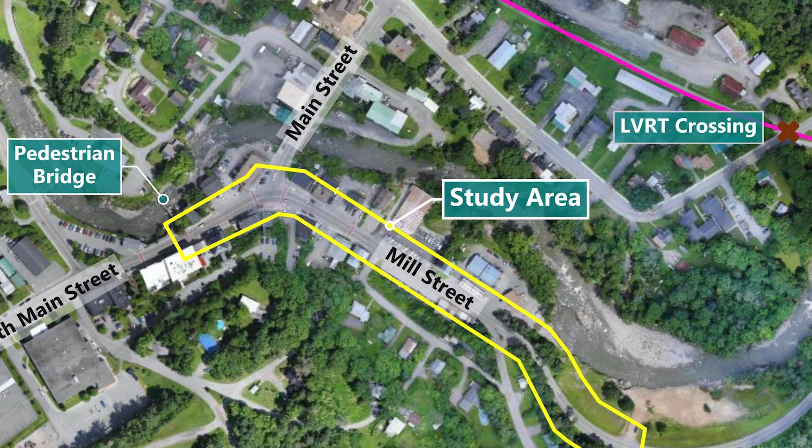So really focusing on the core downtown area here, thinking about some of the desire lines and future connections to recreational opportunities with the LVRT, and certainly thinking about some of the disconnectivity of the existing pedestrian network and multimodal ways of getting around the downtown core area.

After we conducted an existing conditions assessment and talked with the community about their concerns and issues, we went back and worked on developing a purpose and needs statement. The purpose of the study was really to create a safe, comfortable environment in the village core, and a clear transition zone to the core area, improve connectivity of the pedestrian network to support access to community destinations including businesses and recreational opportunities, and improve the multimodal transportation connectivity and infrastructure.

The project need: there were a few needs that emerged from those conversations and existing conditions. Certainly the lack of an effective transition zone - that traffic calming transition between the high-speed rural highway and the village center - a non-contiguous pedestrian network, capacity to handle increased multimodal activity, particularly thinking about engagement with the LVRT connection, and additional infrastructure deficiencies including vehicle turning movements through some intersections, missing or inadequate crosswalks, impaired stormwater systems - other elements of the roadway environment we focused on to improve the experience of everyone using this corridor.

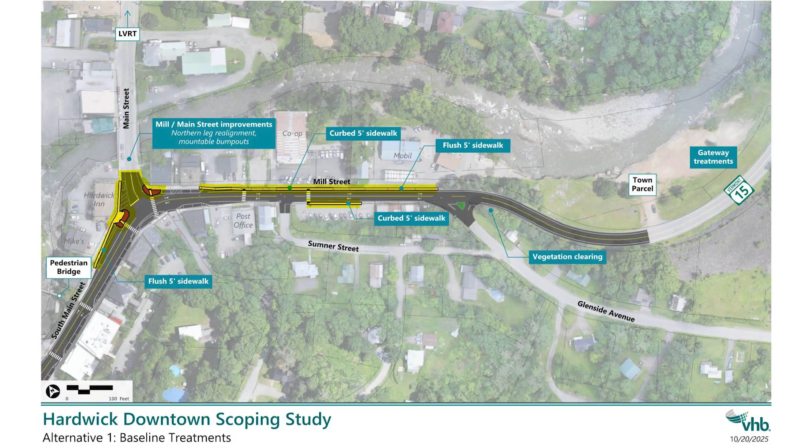So alternative 1, we were calling the baseline treatments alternative. This is really the core pieces we thought we needed to establish to address the core needs identified as part of the first part of the process. Just orienting folks to what we're looking at: over here is where the pedestrian bridge connection will be, and over here on page right is the town parcel that's part of the FEMA buyback process. We're really focused on the corridor between those two points, including the intersection of Main Street and Mill Street.

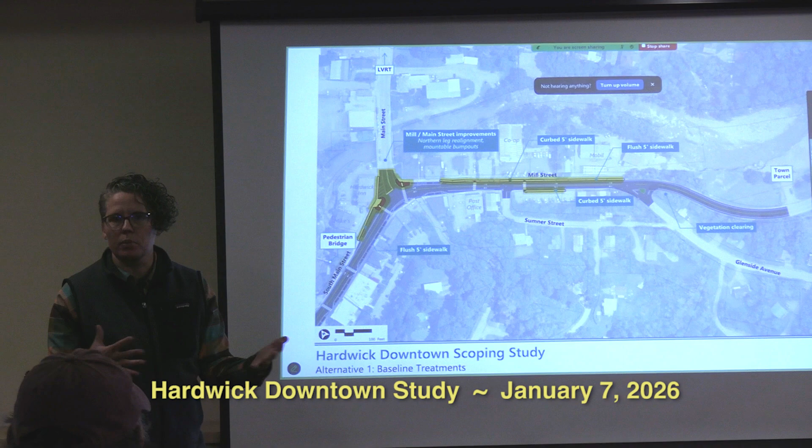So moving page left to page right, we're looking at delineating the sidewalk, particularly in front of Mike's, where there'll be a flush sidewalk to make sure folks know where they should be when walking through the space. Establishing some bulb-outs around the Mill Street, Main Street intersection, again to delineate that space and make sure vehicles and pedestrians understand where they should be as they move through.

Some additional sidewalk connections where the sidewalk is, in terms of its condition, past its useful life and needs some improvement.

Reestablishing those crosswalks that are existing at that intersection, and then really hardening the sidewalk along the north side of the corridor along Mill Street.

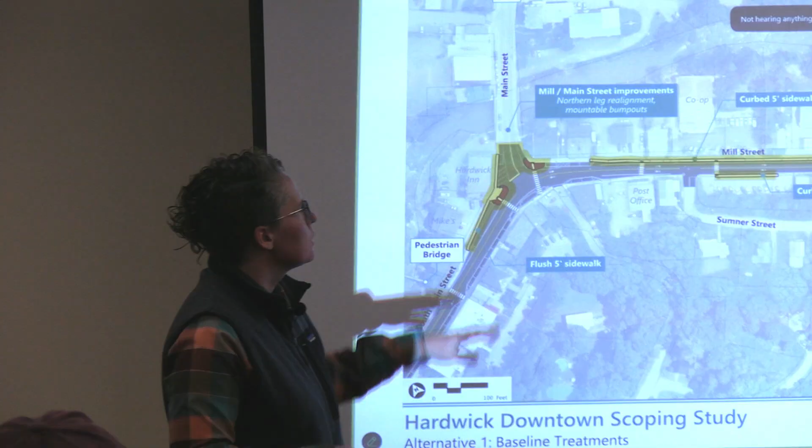So really establishing that delineated space where folks understand they should be walking, curb separated from the traffic where it can be, including a flush sidewalk through the gas station, the Mobil station, towards the end of the corridor.

It also establishes more of a curb sidewalk in front of the public parking on the far side, and makes some improvements to some of the crossings and access points to that facility.

Another recommendation, working our way towards the Glenside Avenue intersection and understanding some of the challenges with that intersection, really just trying to do some of the vegetation clearing that is needed to help with those sight lines at that location, but a minimal treatment option.

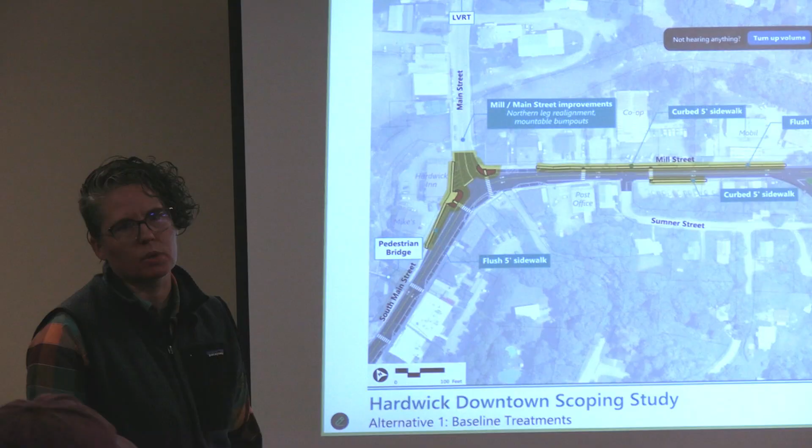So is this the extent of the area you're focused on? This is generally the extent of the area that we were focused on.

We do extend out a little bit with some of the recommendations, particularly later on you'll see around parking wayfinding, some of the transition zone treatments, that sort of thing. But yeah, this is the core area and scope of the project.

Quickly I'll step through. Alternative 2 has essentially all the same elements that you saw in Alternative 1, our baseline treatment option, but this one has moderate treatments, making some other improvements on top of those options. So a couple of things to note here.

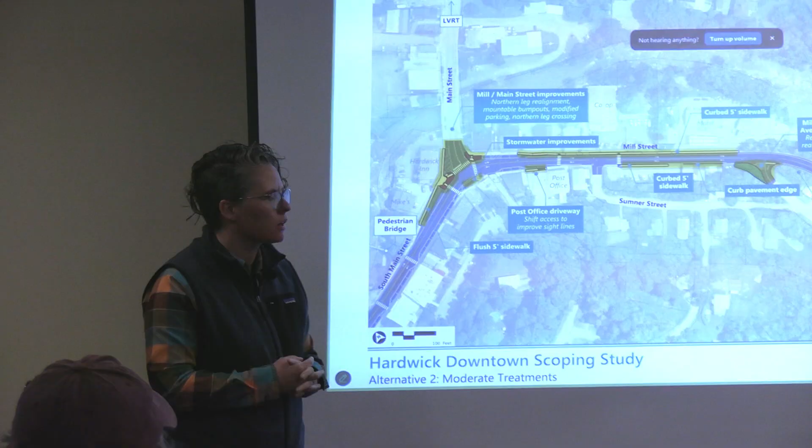The addition of another crossing across the North Main Street approach to the Mill Street Main Street intersection. We saw plenty of people making that crossing, even though there's not a crosswalk there and there's not really curb ramps established to make that crossing. So it's certainly a desire line for folks to be making that connection, establishing that crossing for those folks at the intersection.

And then, like we had in the first alternative, establishing that north side sidewalk, but with this option trying to mirror some of that on the south side. So a couple of additional things to note with this option.

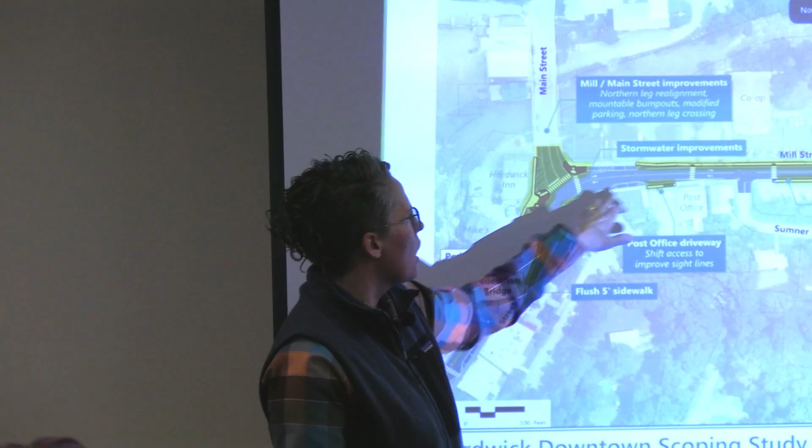At the post office, addressing one of the concerns we heard early in the process with some of the sight lines at that driveway, so actually flip-flopping where the driveway access is at that parcel and carrying through that flush sidewalk through that driveway.

And then again, establishing the curb sidewalk on the south side where the public parking is, but trying to carry some of that curb treatment along the south side, just to delineate and channelize folks and squeeze folks down as they're coming into the village, particularly as a driver, giving that visual cue that it's a constrained environment, you should slow down, you should expect to see pedestrians and other users of the roadway.

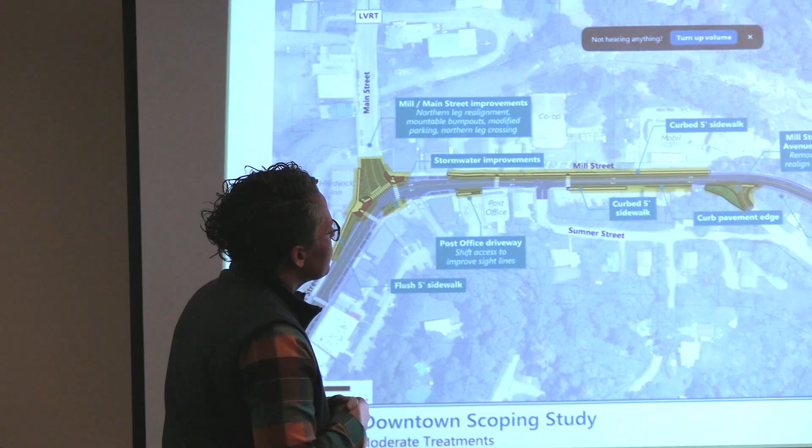The other component to this one that's a little bit different than the first alternative was focused on the Glenside Avenue intersection, realigning that intersection, taking away the triangle treatment that's there today, and teeing in the intersection, again with vegetation clearing, trying to improve the sight lines at that location, and simplifying some of the complexity at that intersection for drivers.

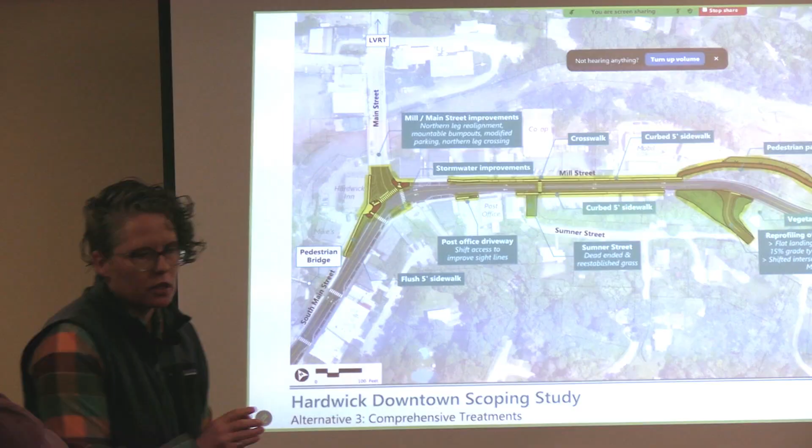And then finally, with the third alternative, the more comprehensive treatment option here, it layers in a couple more treatments to carry through some of the needs that we wanted to address with one of the alternatives. So again, all of the same things you saw in the previous alternative, but then it layered in really establishing and hardening a sidewalk connection on the south side.

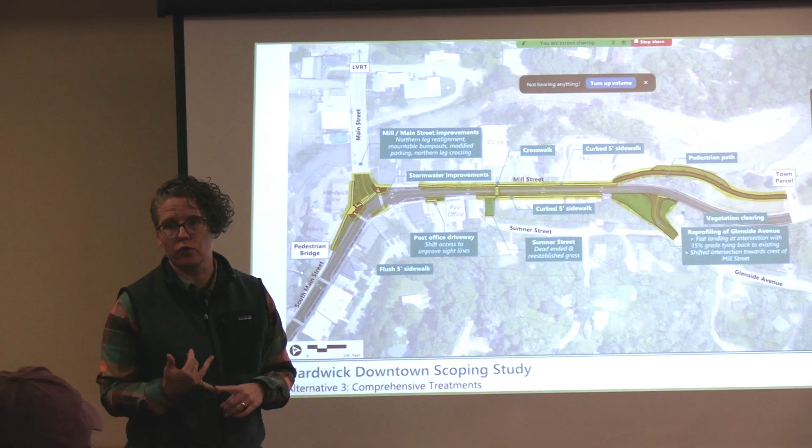And so with that, it contemplated closing Sumner Street so that we could actually establish a crosswalk, or a sidewalk connection, that meets our cross slope requirements for an accessible sidewalk and pedestrian network connection on the south side.

And then a curb sidewalk all the way through to close to where the Glenside Avenue intersection is today. Another component of this alternative that was contemplated and discussed in the last meeting was really doing a full realignment of the Glenside Avenue intersection.

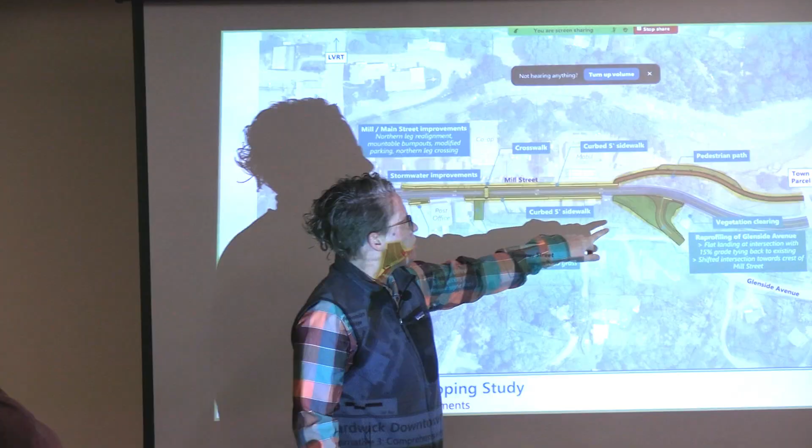So really the crux of this component is that we'd realign that intersection to come into Mill Street at the crest of the existing hill along Mill Street.

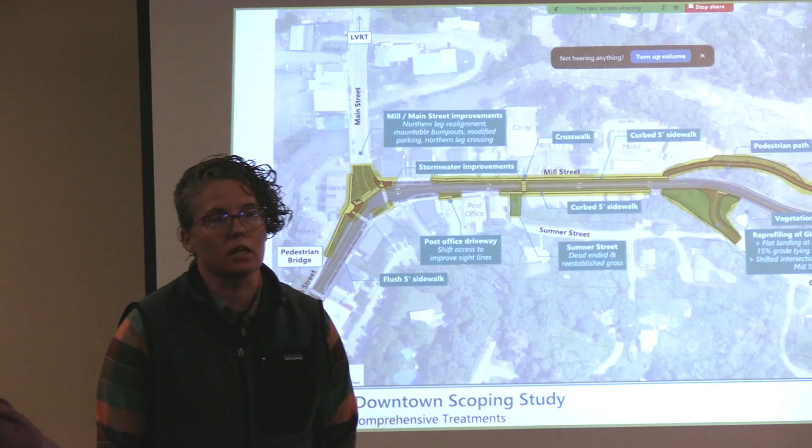So really realigning that intersection to create the best sight lines for folks coming off of Glenside Avenue, and really cutting into the slope where we were doing the vegetation clearing in the previous alternatives to create that connection and really establish some better sight lines and visibility of that intersection, really daylighting that intersection for folks on every approach.

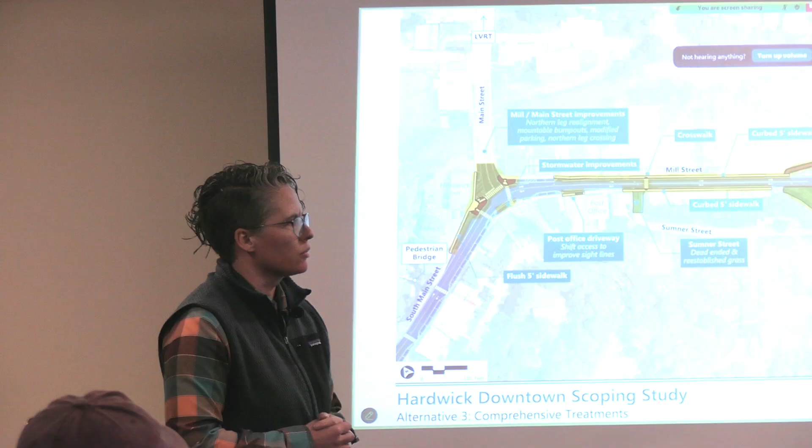Finally, the last major piece of this alternative was contemplating a pedestrian connection into the town parcel at the eastern end of the project area. This is really thinking about the future use of that parcel, which will probably be used for flood mitigation and floodplain reestablishment, but could also be used for recreational or green space purposes in the future. So we're contemplating what it would look like to potentially connect those resources to the pedestrian network downtown so they're accessible to folks.

Last time we were with the community, we talked about those three alternatives and the evaluation associated with them. We won't go into that level of detail again, but just to highlight a couple of things in terms of evaluation: as you noticed, we layered on a number of options and components in each of those alternatives, so progressively it gets more expensive. There are costs associated with each component of the plan. But what we did on the back end is start to parse those out into projects that could be implemented in a phased approach—a small project here, a small project there, as opposed to one big lump sum to fund. If you contemplate all of the comprehensive treatment in alternative 3, we're talking about somewhere in the range of $1.2 million.

Then there's a slew of other things we evaluate as part of this: traffic operations and improvements, which generally show improvements across the board; safety improvements, whether it satisfies the purpose and needs statement at the top of the program; utility impacts, which as we add more components and move intersection alignments, means more impacts to utilities. Right-of-way impacts—again, with the Glenside Avenue intersection realignment, that's where we get into right-of-way impacts, and that parcel on the corner would definitely see some impacts to do that realignment. And resource impacts—we're generally working within the built environment and roadway environment with any of these options, but with that realignment at the intersection, there'd certainly be some impacts and implications.

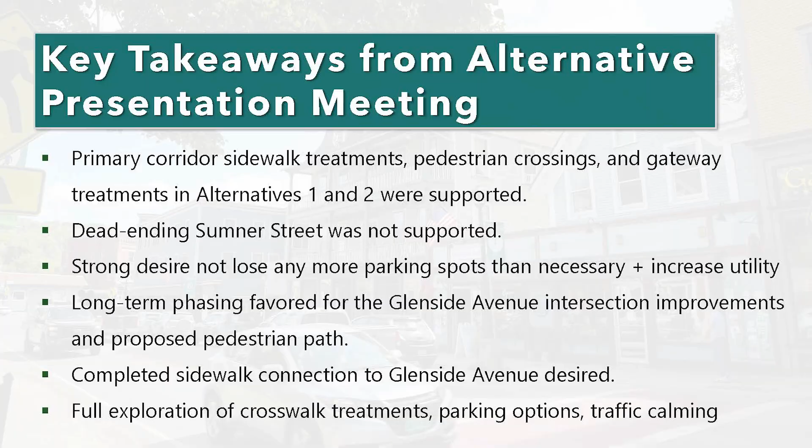One of the things we also heard is about the dead-ending of Sumner Street. We talked about some options to mitigate that—potentially dead-ending Sumner Street but connecting that corridor up the hill a bit behind the post office parcel—and there were a lot of ideas about the vision for what that could be. We decided it was outside the scope of what we wanted to accomplish with this project, but noted there may be future opportunities to make that connection, really achieving a cross slope that works for an accessible crossing at the Sumner Street intersection, by potentially in some future phase dead-ending that road and making the connection elsewhere. But we heard that we couldn't do that without making that connection elsewhere upslope, so we tabled that for this preferred alternative.

We certainly heard a strong desire not to lose any parking downtown, and to increase the utility of the parking we do have, so we're thinking about how to address that with refinements to the alternatives. Long-term phasing was favored for the Glenside Avenue intersection—getting into that mentality of a phased approach where we first do the pedestrian treatments and address those needs, then think about what we can do to that intersection to make it safer for everyone.

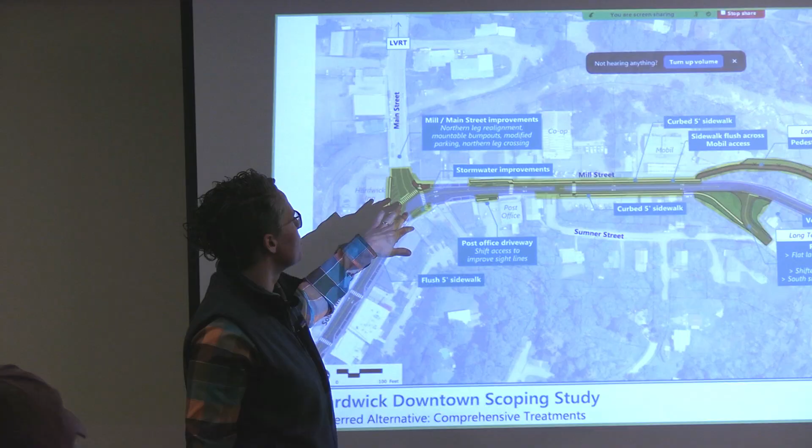Again, we're really establishing the sidewalk along South Main Street, the bulb-outs at the intersection of Main Street and Mill Street, the additional crosswalk across the north side of that intersection, and really establishing and hardening the sidewalk connections along both the north and south sides of Mill Street.

The additional sidewalk connection up to Glenside Avenue would be included as part of the longer-term project to realign that intersection, along with the long-term pedestrian path over to the town parcel, which we're contemplating as a longer-term component.

So we'll zoom in and look at a little bit finer detail, a little bit bigger on your screen here, for some of those treatments, just to get some familiarity.

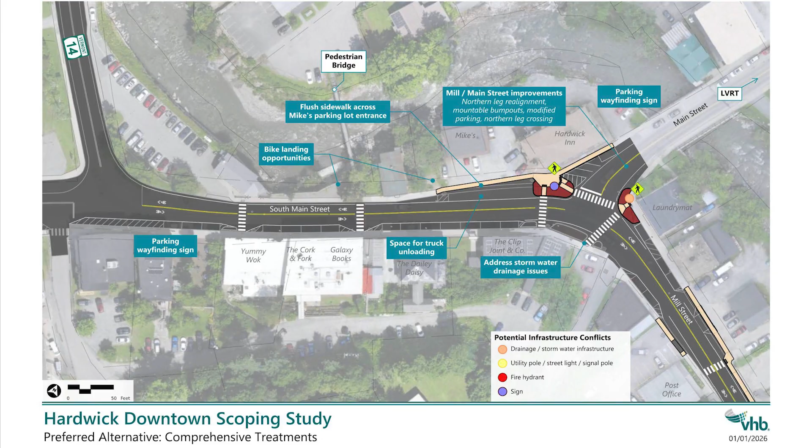So we're a little shifted from the previous orientation. Here's the pedestrian bridge and existing sidewalk. A couple of additional things to note here in the preferred alternative.

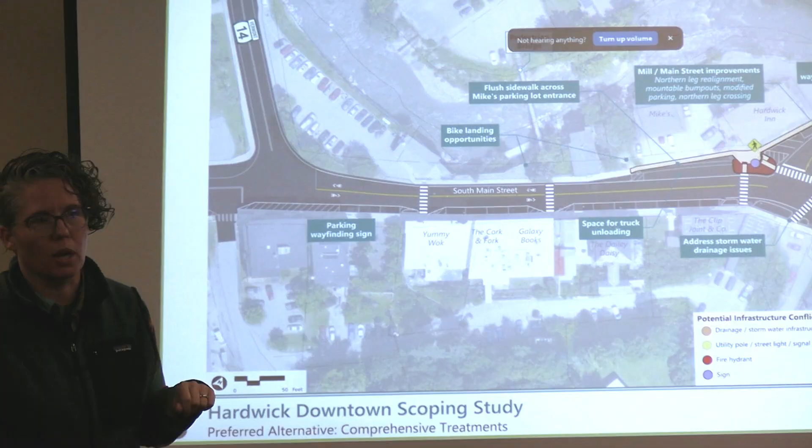Recognizing there are some bike landing opportunities, especially with more traffic from the LVRT, we're finding places to establish bike parking in downtown—either at the landing above the pedestrian bridge or at the park here at street grade—to create an intercept for folks who want to be downtown.

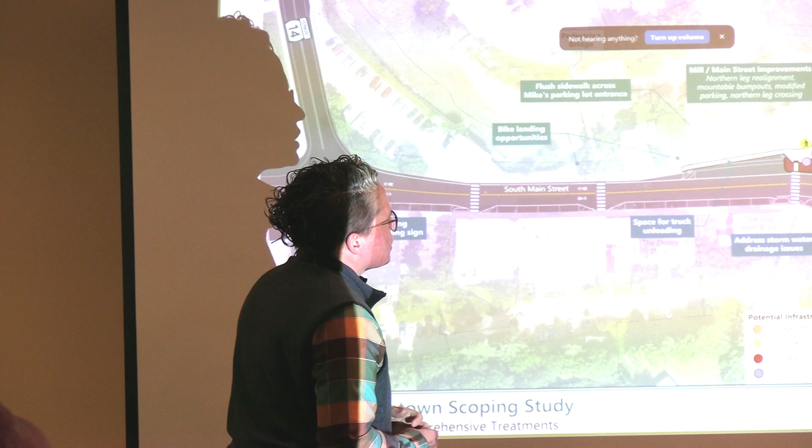Again, at the intersection, we're contemplating some bulb-outs to take up that extra space and delineate it for turning movements. It's certainly a complex intersection, and we did see folks passing on the right to make a turn around someone. The bulb-outs on the far side really limit the ability to pass on the right when someone's making a left, drawing in the edges of that intersection and making sure people know where they should be and limiting where they can be.

That also effectively shortens the crossings for our pedestrians, so we're really trying to make the space pretty friendly and approachable for folks on foot.

I'm just going to highlight here—this is the spot we had some conversation about the last time we were all together—that last parking space that is currently utilized as a parking space.

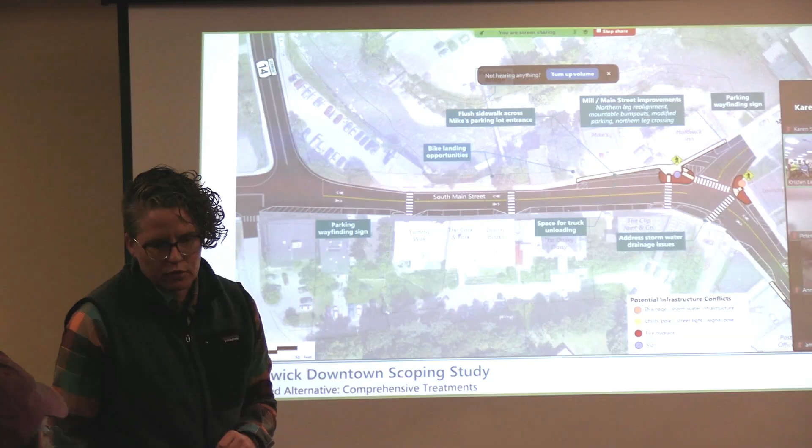Recognizing that there's an effective loss of space there, but as we move along the corridor, you'll see we were able to find a spot to gain that space back. A couple of other notes: we heard there's a need for truck unloading space, so maintaining this space in front of Mike's for truck loading and unloading.

While you're on this slide, I know that's not the focus area on the left side of town, but most people within walking distance live to the south or the west, and there's no safe crossing for any of those residents right now. The town just took out a crosswalk. I'm wondering why that area wasn't considered downtown. I'm not trying to sound cynical, but that's the most dangerous intersection, I think.

Yeah, we absolutely recognize the complexity with the way that intersection is controlled for traffic, and the lack of pedestrian access there. For this project, it's just outside the limits of our scope, but Tracy has something to add. This is not meant to be the end-all and be-all of traffic planning, it's just a first phase.

When the grant was first being considered, it was only going to be Mill Street, because that's the street that has no sidewalks right now. There was a little bit of mission creep even coming onto South Main. But we understand there needs to be additional work done. This is just the first bite of the apple with this study.

Anecdotally, having worked right where the old co-op was, no one ever used that pedestrian bridge, by the way. It's not how people are coming to town from the residential areas. It's an awesome bridge, don't get me wrong, we'd love to take breaks and go there, but I'd see more need to fix this end of town than fix Glenside.

In terms of pedestrian access, it's a very dangerous intersection. I'm surprised we don't have more car accidents there, but I think far more people are walking and biking from this other end of town.

Now that we've been through this process with that street, we can just do it again, pick up where we left off here, at this end of the corridor. Great point raised, and recognizing that establishing these connections is going to hopefully increase that demand for some of these other parts of town that do need to be addressed.

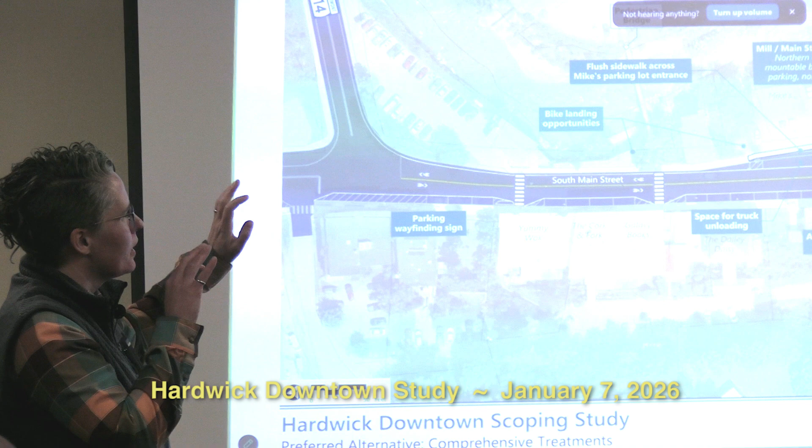One more note worth highlighting is the parking wayfinding signage. We noticed on the way in a lack of parking wayfinding, especially coming in from Route 14 at this end of town. There is some parking signage up North Main Street, but it doesn't direct you to the public parking along Mill Street. So there's definitely a need there, and we'll talk a bit about that parking wayfinding recommendation later, recognizing there are some places that should be highlighted to let folks know where those opportunities exist, not just on the street.

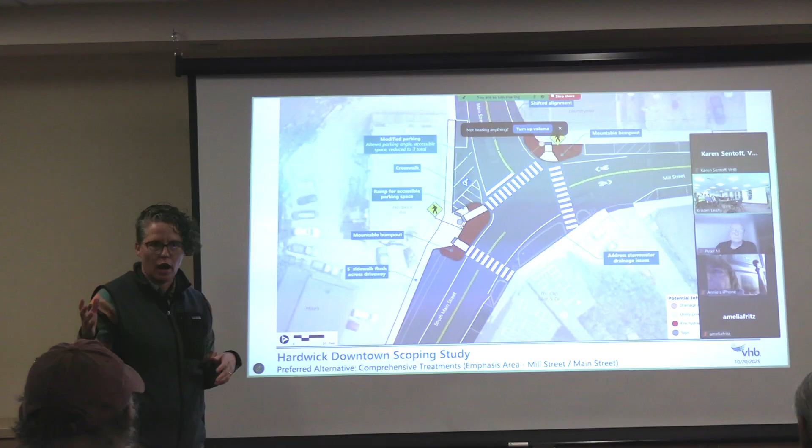Zooming in here on the Mill Street and Main Street intersection. Just to highlight the change in color here, the red is meant to be a mountable treatment, so trucks will still be able to get through, but vehicles will really not want to make that movement. We used a beveled curb and a raised section, so trucks can track over that and make the turns they need at that intersection, but passenger cars typically won't want to go over the curb. So it effectively takes up that space so vehicles know where they should be in the intersection.

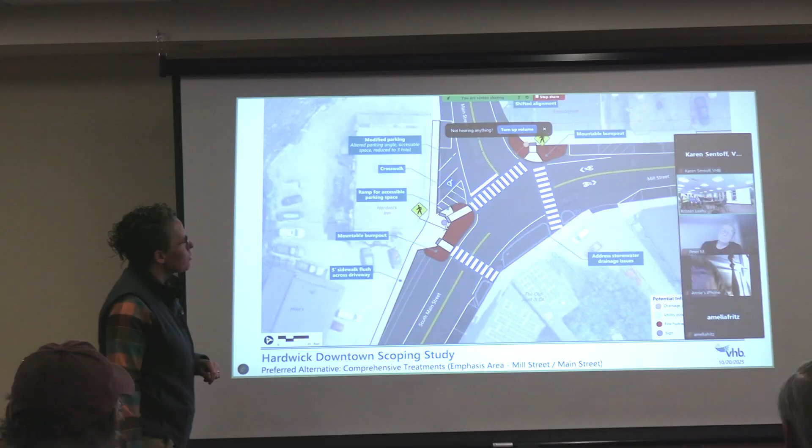This also has the added benefit of shortening the pedestrian crossings, establishing that crossing on the north side of the intersection where that desire line is. We'd modify the parking layout a little here to get those spaces in and establish an accessible parking space, with signage for the pedestrian crossings, and shift the alignment slightly on this segment of North Main Street to tee in that approach and make it clearer where folks need to be.

Can I ask you a question about that? Certainly. On the north side of North Main Street at the laundromat, what's the purpose of that bump out there, where there was once a parking space before the realignment of Route 15 through town?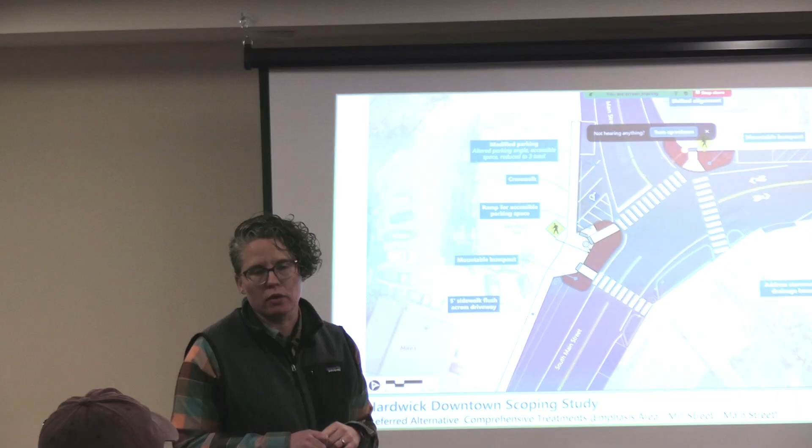Okay, well, so a couple of things to be thinking about, for this side and for that side as well. Really, the letter of the law says that we need 20 feet between parking and a crossing in the state of Vermont, so we're really trying to establish that buffer space for parking spaces to be outside of that 20-foot buffer. That's about making sure pedestrians are visible and not blocked by a parked car close to the crossing.

Does that show the current bump out on the other side of the road across from the laundromat? The bump outs are shown just like a gray outline here. Yep, so those are the existing ones.

Just putting a note out there that one in front of the inn, people are going to blow their tires on that unless it's made to be driven over. Yeah, they had to redesign the rotary in Hyde Park because it kept blowing out tractor trailer tires. If somebody comes down that hill with a trailer, they're gonna either drive into oncoming traffic to make it around that turn, or they're gonna have to drive on top of it, if that's roughly to scale.

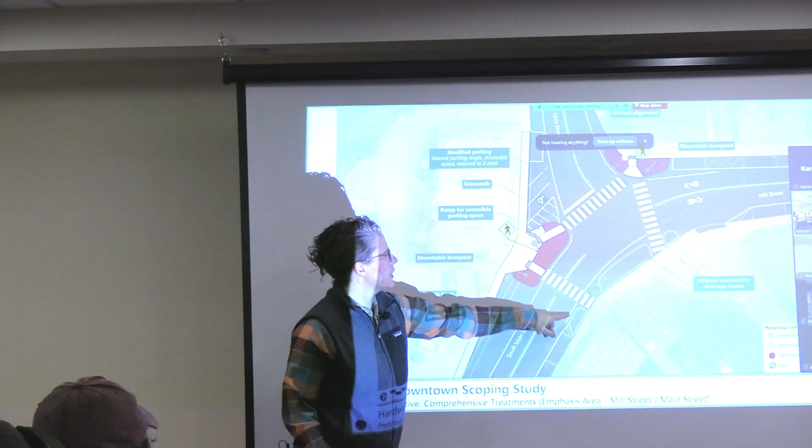Yeah, so can this be made like the other bump outs in town right now? It's more of a curbed bump out with quite a bit of reveal. These would be essentially like the mountable section, a little less egregious than the mountable section in the middle of a roundabout, right, where the tractor trailers are tracking now. Yeah, so it'd be an angled curb and then a paver treatment on top that feels uncomfortable for a car to be on, but the tractor trailers will be able to roll right over it.

Okay, I'm gonna keep moving forward, but we can definitely double back if folks have additional questions.

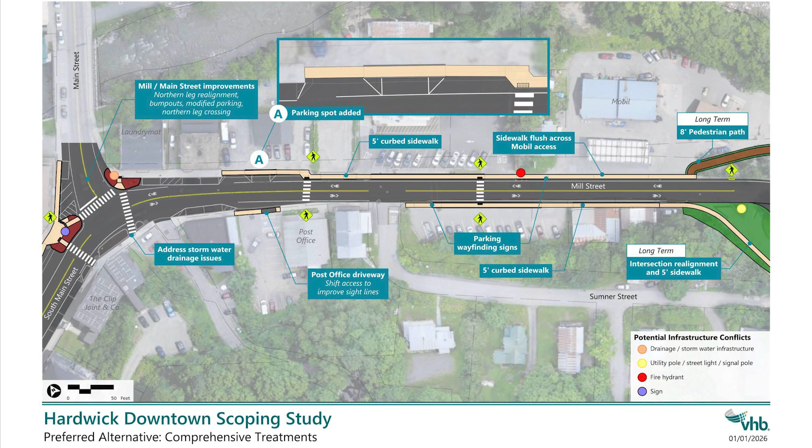As we move along the corridor here, on the north side we shifted the alignment of the sidewalk to establish one more parallel parking spot, and then we shift back to neck in and make that crossing over to the post office pretty short. Then, again, establishing the sidewalk along the north side, and once we're in the public parking area on the south side, establishing that sidewalk along the south side.

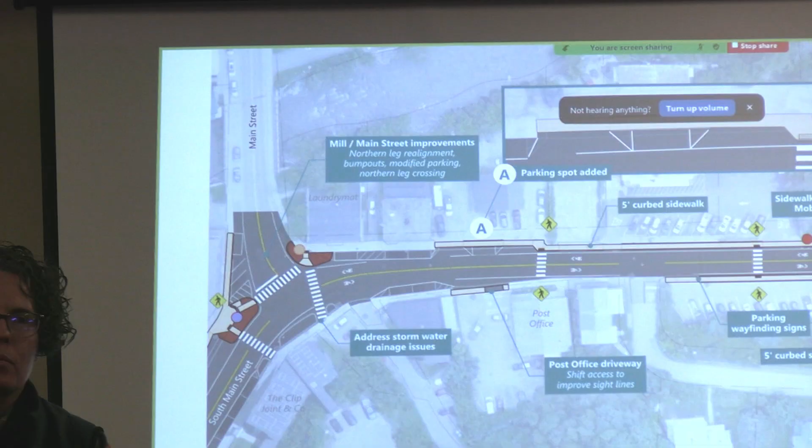The thing you're not seeing here is the dead ending of Sumner Street, and we're really focused on that cross slope. Sumner Street comes in at a really steep angle, and technically, based on the standards we need to meet for an accessible crossing, that steep slope just doesn't meet the bill.

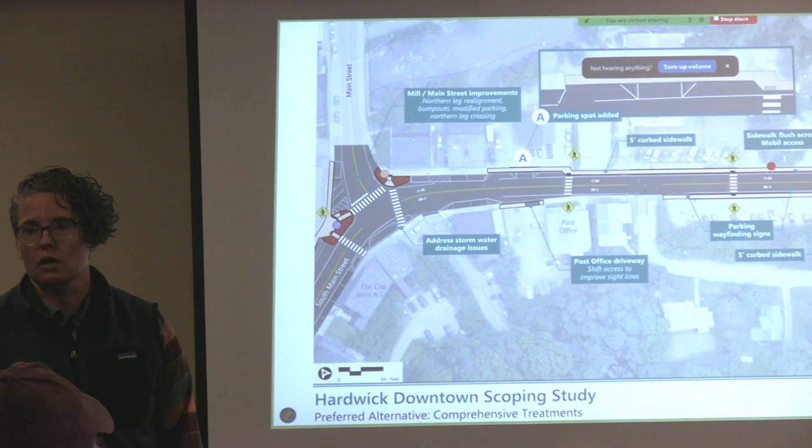So although there will be a sidewalk and then a gap and then a sidewalk, folks will walk on that side. But really, to meet the spirit of what we need to achieve for an accessible crossing, we will have the accessible crossing here at the post office and then establish another accessible crossing on the far side. So if folks really do need this accessible route, that'll be available on both sides of the road to make that connection.

Certainly, parking wayfinding, recognizing that opportunity for the public parking. This preferred alternative does include that shift to the post office driveway to help with sight lines, and contemplates that sidewalk treatment on both sides, flush through the driveways and flush through the access to the Mobil parcel there on the north side.

And then would parking at the post office be on the haircut side?

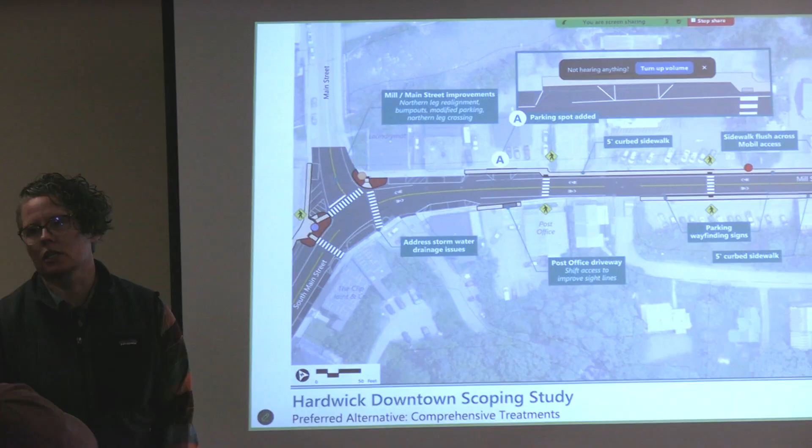Yeah, so it would flip-flop how the parking is on the interior circulation. Our sidewalk and curb would come through this section, which is right now the driveway. Then the driveway would be where the current parking is, and the nose-in parking spaces would end up likely on this side of that driveway to make that change.

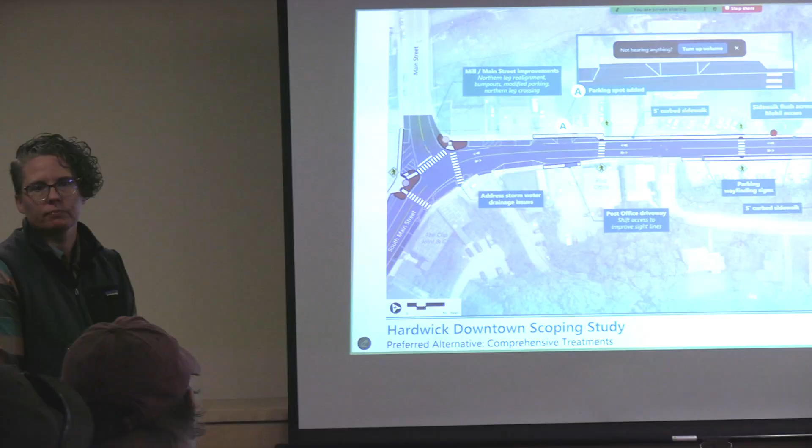Does that affect the parking in the back of that lot? Yes, which seemed like the preferred approach. They want to change the site circulation for that location. She's going to need permission from the post office, the USPS, to do so. Yeah, and that would be a really helpful change.

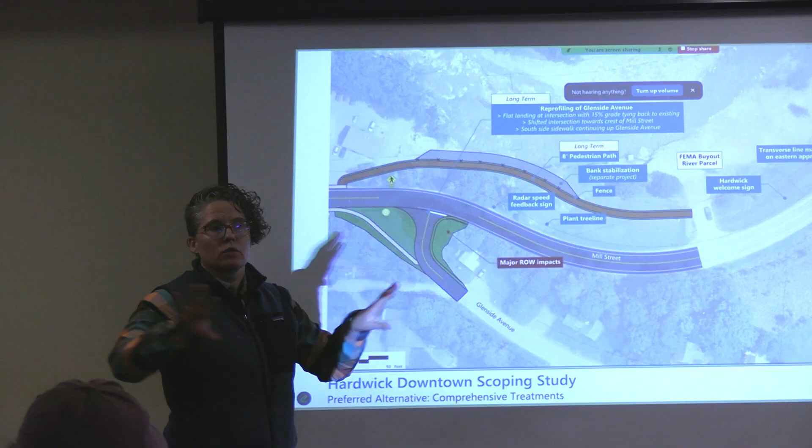And then here at the eastern end of the corridor, just a couple more things to highlight. Certainly contemplating in the long term that realignment of the Glenside Avenue intersection, which establishes the intersection point with Mill Street at the crest of the hill, creating the best sight line we can for folks coming off that roadway. This does mean some right-of-way impacts for that parcel on the corner, and some significant regrading that would have to occur.

Again, long-term vision here, including that pedestrian path into the town parcel and trying to establish that connection for whatever the future use of that area will be.

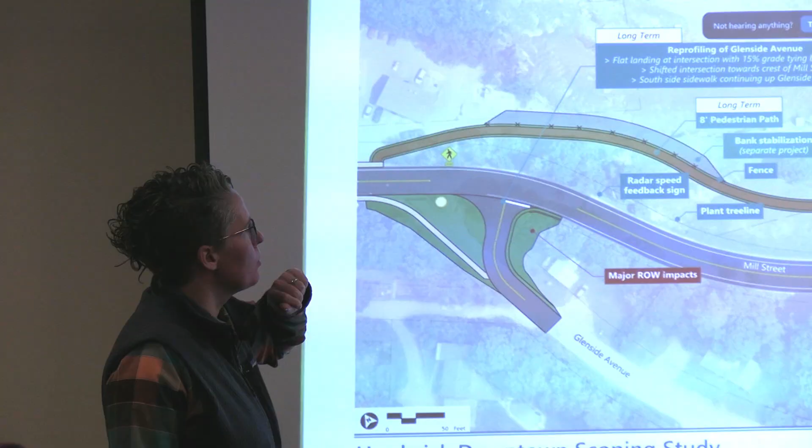And then just recognizing a number of gateway components that we wanted to pull forward, to establish that transition zone and get folks to slow down sooner as they're coming into the village from the rural high-speed highway zone. So a couple of recommendations: transverse line markings, which I'll show you an example of, as you come into the curve here, and certainly want to coordinate with VTrans on that, since the line in the sand is somewhere around here of where it transitions to Class 1 town highway.

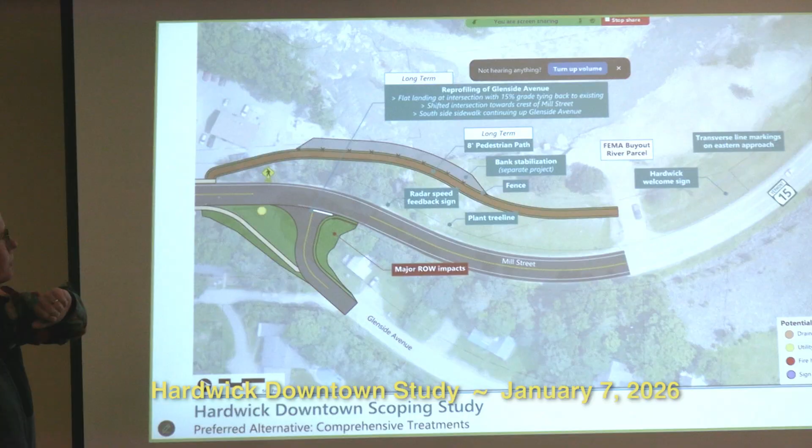Establish a welcome sign that gives that visual cue that you're coming to a place, time to pay attention and slow down and think about how you're operating your vehicle. And then another suggestion is planting a tree line, if possible, along the edge of that parcel, again giving that visual cue that there's an established thing you're coming into, so start paying attention.

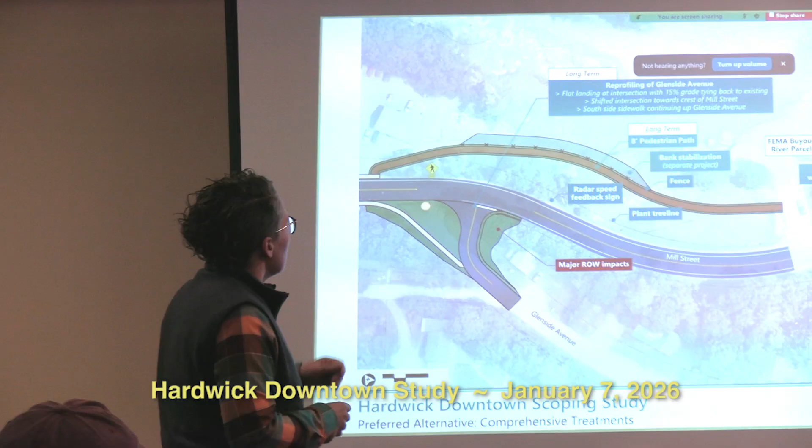Another recommendation is to take the existing radar speed feedback sign and move it to this side of the curve, again giving that visual cue for folks to slow down and start paying attention to how they're operating their vehicle, catching them before they get to the Glenside Avenue intersection so they can slow down and get feedback on how fast they're going. There's a couple things to think about with that, but we'll get into more detail in the next slides.

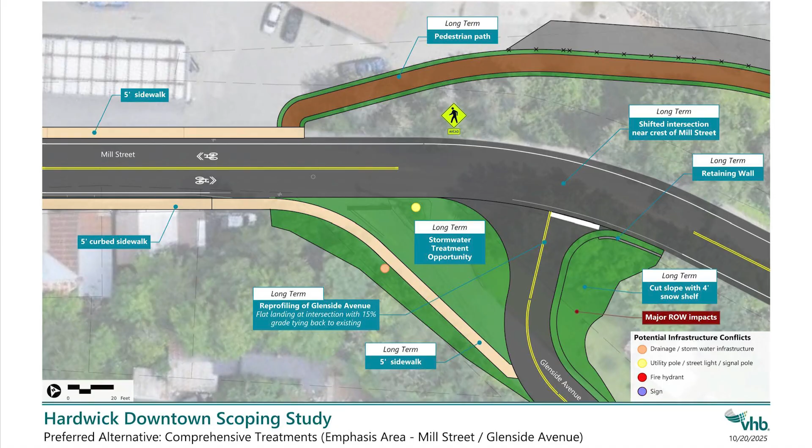This is just a zoom in at the Glenside Avenue intersection and a couple additional elements we wanted to pull forward as part of that conversation. Certainly this will take regrading and reprofiling, and we'll want to meet the crest of the hill that is in the existing curve there.

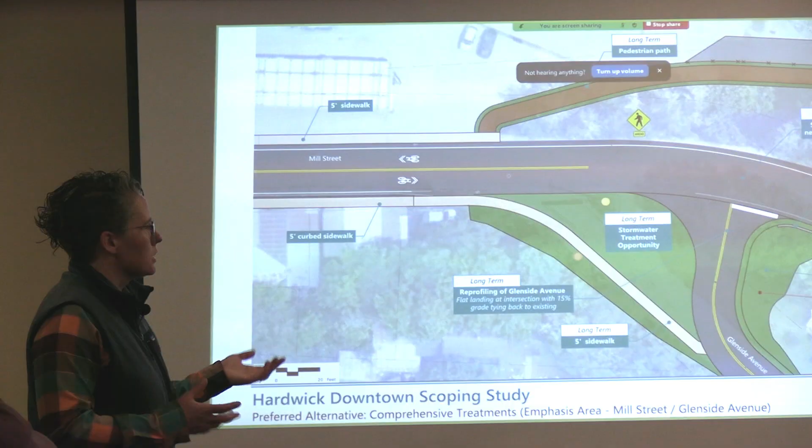What this realignment does, a couple things: certainly there's going to be a cut slope and a need for a retaining wall, but it establishes the intersection to create great sight lines in both directions. It also creates an opportunity for potentially some stormwater treatment, especially coming off that hillside, an opportunity to catch some of that stormwater and handle it there instead of further down the system. So really an opportunity for that treatment.

What we heard loud and clear in the last conversation is trying to create that connection up to that neighborhood, making sure folks in the neighborhood of Glenside Avenue, Sumner Street, and further afield have a place to get into the pedestrian network up the hill a little bit. So really trying to make that connection along the existing edge of roadway, which is essentially the edge of what you're seeing here for that sidewalk.

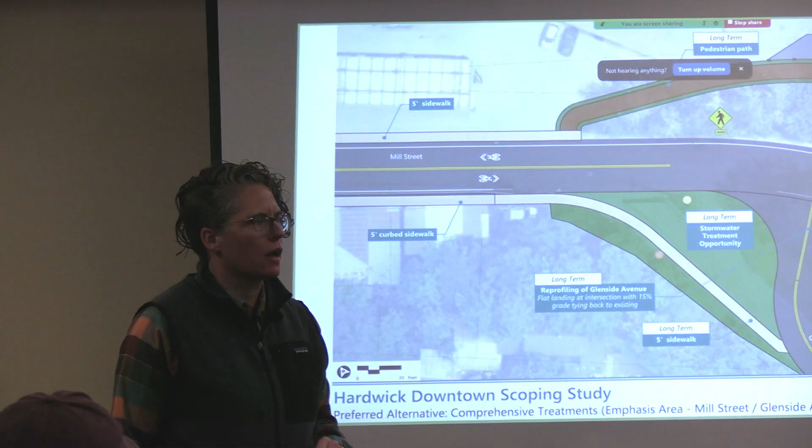And there are some features in here to consider. There's an old retaining wall that is historic through that section, so that's something we'll want to maintain as part of that project.

That's going to take a lot more work on Glenside because it's hardly walkable given how narrow it is. Yeah, I don't see people walking down from one side. Absolutely.

Not often, no, it's too steep. I don't think there's... I've seen a couple people walking down. I used to go do it.

All right, so just focusing in on a few more of the recommendations and treatments we were asked to dig into in a little more detail the last time we were all together.

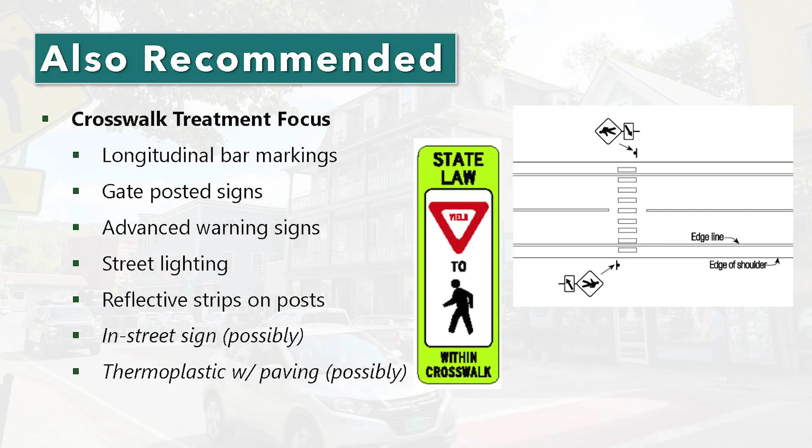One of the things was crosswalk treatments, and we heard loud and clear that we want our crosswalks to be visible and folks to be paying attention to them. So we brought forward a handful of recommendations for establishing those best practices. Longitudinal bar markings are what our standards and guidance tell us is the most visible treatment you can have in terms of pavement markings to establish a crosswalk. That's these bars you're seeing on the page here.

Gate posted signs means actually having a pedestrian crossing sign on both sides. So if you're blocked by a vehicle or something else, you still see that there's a pedestrian crossing by seeing the sign on the other side of the road. It's essentially posting signs on both sides of the road for that crossing, for both directions.

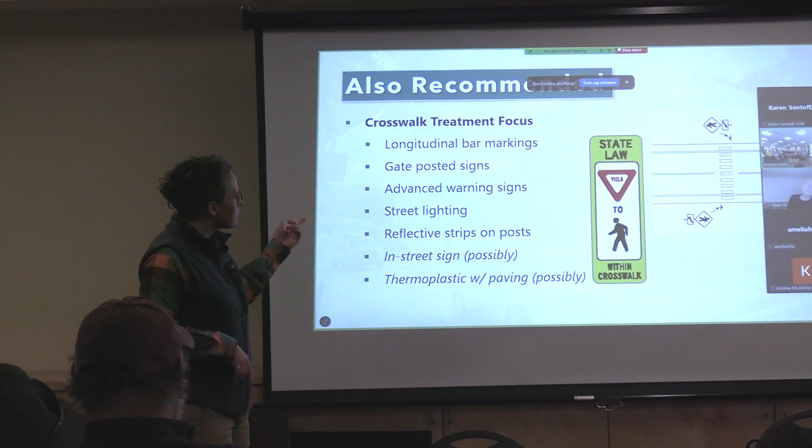Advanced warning signs - not every crossing has one that's appropriate, so we're making sure those are in place where appropriate. Street lighting was something that came up in the last conversation, something to pull forward here - making sure that as we're establishing new crosswalk locations, those are properly lit.

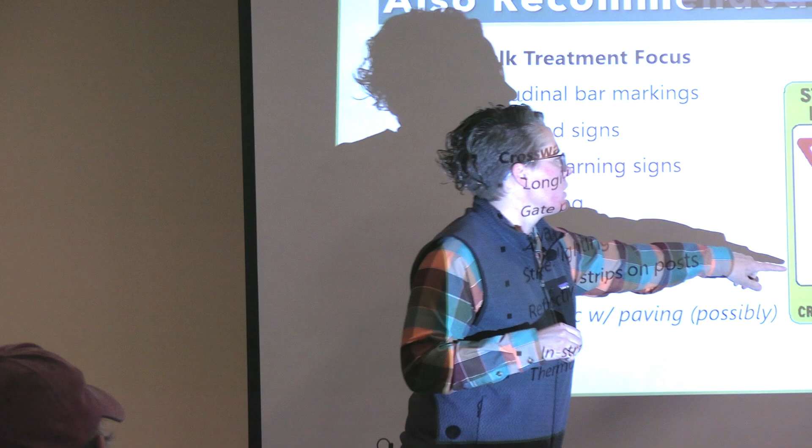We could add reflective strips on the posts for pedestrian crossing signs. That certainly helps, especially at night - makes it flash for folks with their headlights on it. An in-street sign is also another option, especially in this environment where you're in a slow zone downtown. Having a sign like this in the middle of the road, in the middle of the crossing, has that effect of channelizing folks and making them pay attention and slow down.

So those - and they got destroyed. Did they? They got run over? If you're making the road narrower too... I'd always... In some places it makes a lot of sense, in others, understood that they get run over.

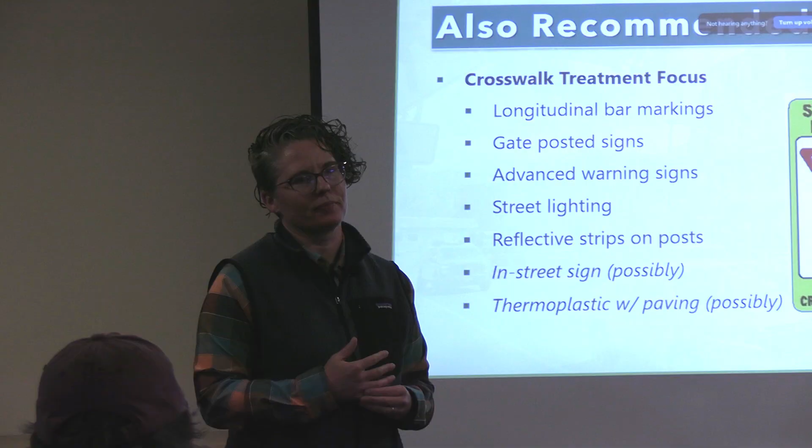The blinking light at the laundromat seems to work pretty well for giving people the cue to slow down. I was wondering if it would be possible to add more blinking lights, like by the diner. The state has a regulation on how close you can have those blinking lights, because their theory is if you have too many it actually distracts people. So there's a set distance. Those lights are good at night but not in the day - in the daytime people drive right through them. They're not large enough. I know they're bright, but people drive through.

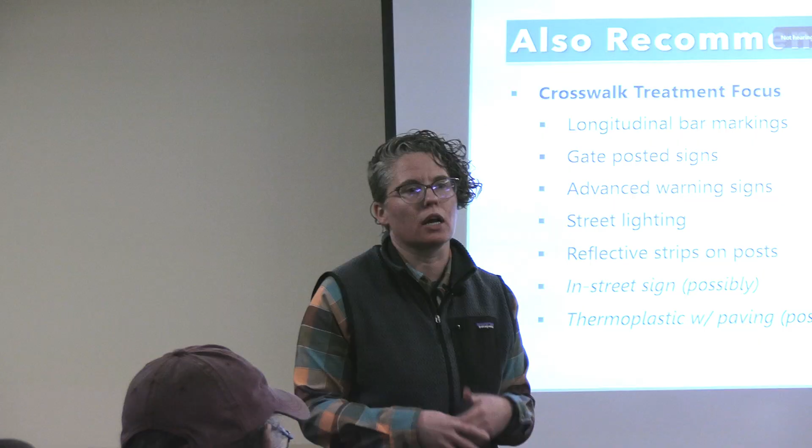So the RRFBs, the rectangular rapid flashing beacons, are a great option, but we don't want to just have every crosswalk have them. If there's a particular desire line that sees a lot of pedestrian activity, that's really where we want to concentrate having that kind of treatment. And the state really hates blinking things, generally.

I hate to say this, but I've never noticed the blinking light by the laundromat, and I drive through there four times. That's what I mean. Sorry, I've seen it a lot - it gets used a lot.

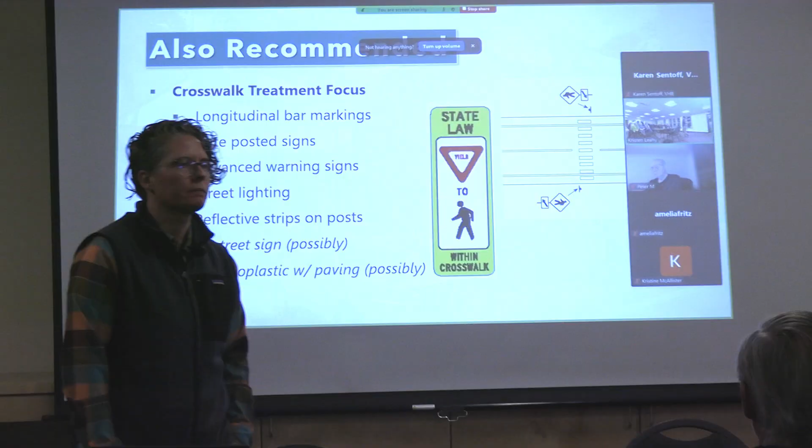So when you were talking about the crosswalk - when you push the button - the bar, the white bars, which we used to have. Yep, and then there was a lot of work done on pedestrian safety, with a committee of people that worked on that through the planning commission and the select board.

And then we tried these red crosswalks. While everything goes away in the winter, because it does, the red has actually been very effective in downtown. It's much more noticeable - I've noticed it in Newport and many others.

So it's also approved, but I need to see us go back to those white lines, because nobody sees them. Well, we could always combine it - have a red background with the white lines across it, and then it would be the best of both. But every time we get a quarter inch of snow, the white lines don't show no matter how they're arranged, whereas the red tends to show up a little better. And it's not to say that - right now you have transverse lines on each side of the pedestrian crossing, and then the red imprint in between.

Those transverse lines are also an approved and fairly effective visual cue, but currently only in downtown. It seems like people slow down more there, though I don't know when I cross it.

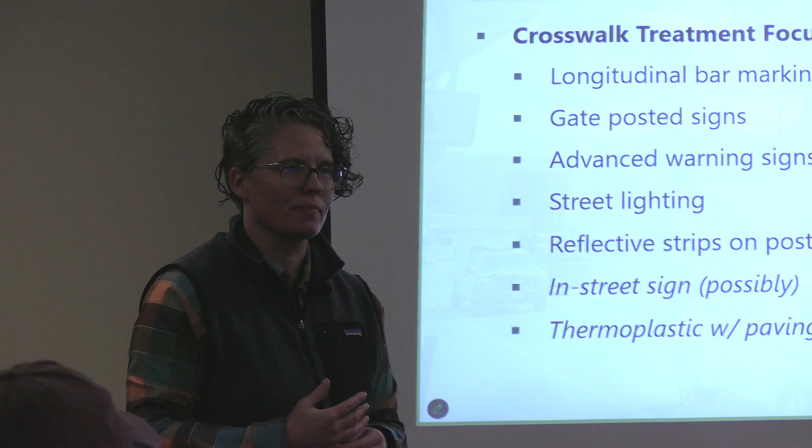It's an overall problem, slowing down for crosswalks. And of all these things, I think these measures create visibility more consistently through all of our seasons than pavement markings, unfortunately, since they disappear with all the plowing, snow, and salt.

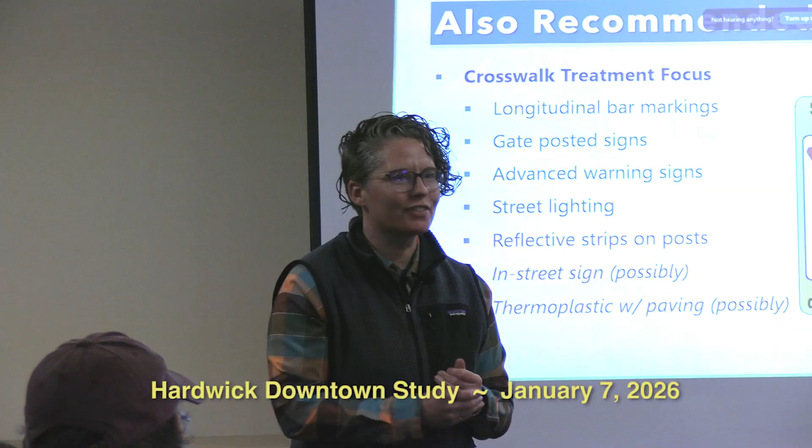There's paint treatments and thermoplastic treatments, with mixed messages about best practice. I think thermoplastic lasts longer in other climates, not necessarily in Vermont, and it's required to be put in during paving, so it's really once every 10, 12, or 15 years. For something you can maintain with more regularity and affordability, paint is really the way to go.

I was under the impression that posted crosswalk signs were required by law. You're required to have a crosswalk sign on the approaching side on each side of the crossing, but you're not required to have the back side of that sign match. There are crosswalks we have that don't even have that. But for the price of a sign, where's the harm?

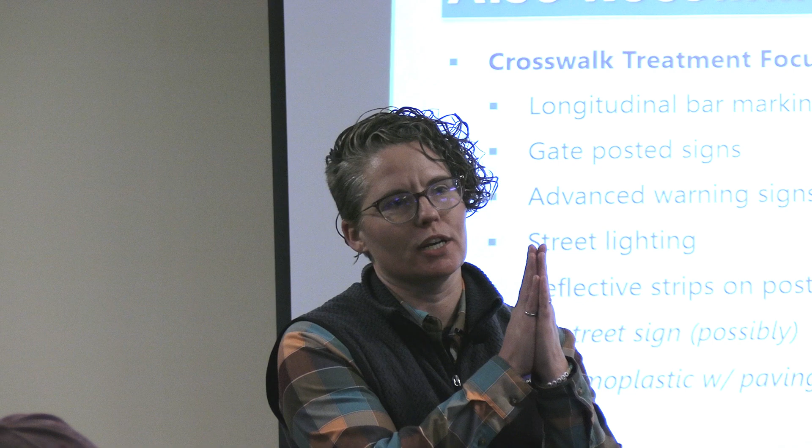Right, what you're saying is you can often sandwich them on the same pole, so you're just adding a second sign to an existing pole, or to a new pole, for both sides.

Not with this town manager, but with the previous one, I asked about the crosswalk from Memorial Park to the electric building and was told we can't do that because the signs are too expensive. Hopefully that's not the case with the current town manager and select board, but I've heard that here.

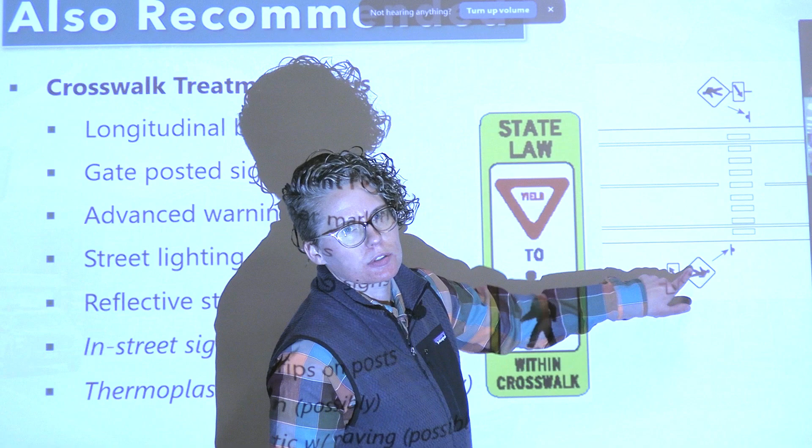It's worth noting the diagram shown is how it's required to be posted: on this approach, this sign facing, and on this approach, that sign facing. But we'd sandwich those so you can see them both on the left and the right as you're approaching.

On advanced warning signs, with so many crosswalks, maybe six or seven, you'd have confusing signage if every one had its own. So the thinking is, as you approach a space with a concentration of crossings, make sure there's an advanced warning sign ahead of the first crossing folks would encounter, and on both ends of town. But we wouldn't put one at every crossing, since that would stack an advanced warning sign on top of an existing pedestrian crossing sign, and we don't want too many signs.

The other half of that is our police aren't into enforcing crosswalks, and a lot of people in this town will just blow right through one. They'd rather give a parking ticket, so that has to be part of the discussion going forward. If you're actually trying to make it safer, the drivers are the ones who need to be held responsible, not necessarily the pedestrian.

Another component we wanted to discuss is parking wayfinding, really thinking about increasing the utility of existing parking. There are established parking areas with lots of spots, and we want to make sure folks are oriented to them as they come into town from either direction, posting that parking clearly. We also highlight bike parking signs for folks coming down the hill from the trail looking for a place to land their bike so they can pop into a shop and grab a coffee and a sandwich.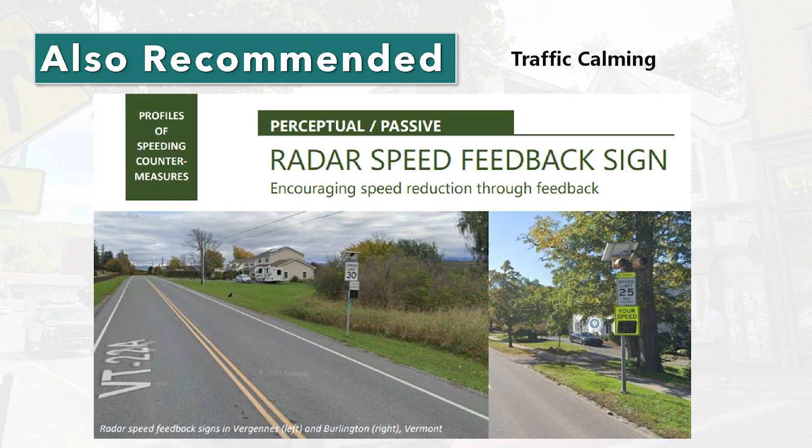A couple things to note: making sure it's open to the air, especially being solar powered, making sure it's capturing solar for most hours of the day, so we don't want it next to tree canopy. We do talk about establishing a tree line, so really being strategic about where we're planting trees and where we have that radar speed feedback sign.

The other recommendations are mostly about making sure we don't have too many signs on top of each other. So we're recommending a spacing, I think it ended up being 250 feet between the speed limit sign, the intersection warning sign, and the radar speed feedback sign, making sure those are spaced appropriately for the speed of the roadway.

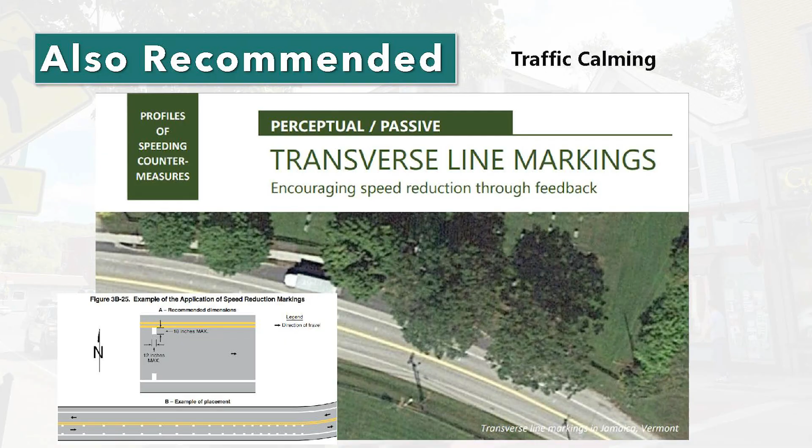And then the transverse line markings - this is a treatment that creates the visual effect that you're speeding up. The line markings get closer together as you move along the facility, giving the visual cue to drivers that they're going faster even though they're going the same speed. I pulled the guidance from the MUTCD on how we do that, and we're recommending this ahead of the current driveway to the town parcel, approaching town, to have that effect of slowing people down as they come through the curve and into that space.

Something we can talk to VTrans about - that treatment does exist across the state along state routes, so something they seem to be amenable to.

This is the last zoom in on additional recommendations - thinking about that stormwater treatment opportunity with the realignment of Glenside Avenue, certainly an opportunity with that green space to do some on-site stormwater catchment treatment. So thinking about potentially a gravel wetland or subsurface infiltration chambers - those steep grades are a constraint, but could also be pretty effective in capturing a lot of the upslope stormwater coming down the hillside. I know there are issues in other parts of town with steep slopes and debris that comes downhill as part of that.

So really thinking about that and being strategic about it. For that improvement project for the intersection itself, we're thinking somewhere in the range of $40,000 to $200,000, depending on the treatment and the catchment area we want to be treating, but could be adding on that component to deal with the stormwater piece.

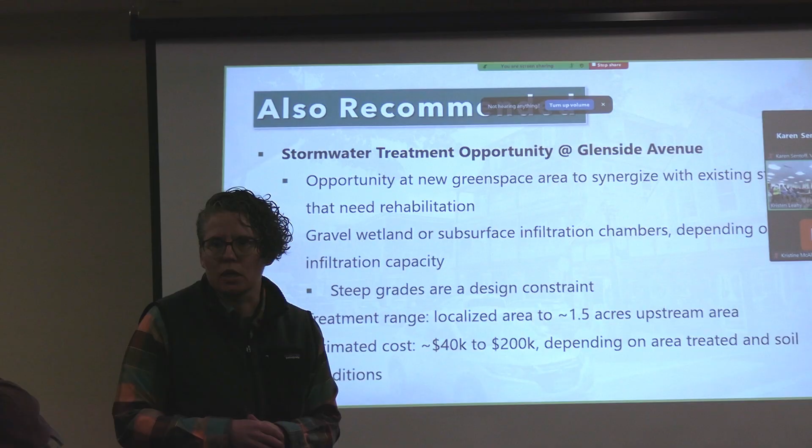And also it could open up some other mechanisms for funding, because there are other pots of money associated with stormwater treatment and mitigation. So just thinking about being a little creative in how we might make that project happen.

All right, I'm happy to jump back to the overarching view of the preferred alternative, but really wanted to open it up for discussion and anything folks want to highlight or talk about in terms of the preferred alternative that we're hoping to carry forward. It's already part of our draft scoping report that we are almost ready to turn over for review. So any questions, thoughts, clarifications, feedback on what we're pulling forward in terms of the preferred alternative?

Yep. On that new crosswalk on North Main Street, could you bring that up there? Certainly. Jump back to the... let's see. Yeah.

I agree that there needs to be a way to cross there, and myself and a lot of people will walk partway up North Main Street and cross where it's a little less busy. Where you're showing it seems like we're leading people into a really hazardous area, because the traffic coming from the east isn't required to stop for pedestrians crossing that way, but you're practically sideswiping them.

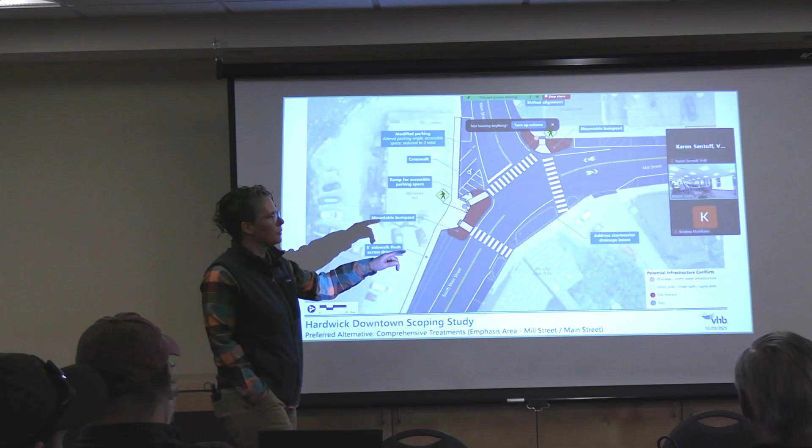It's always required to stop for pedestrians. No crosswalk, so you don't come to a stop - you're thinking on this approach. Yeah, so this would continue to be free flow approaches on Mill Street from this side, and from South Main Street on this side.

What it does do, with that bulb out, is really establish where the vehicle needs to be. So a vehicle going straight couldn't also simultaneously be making that right, which we have observed at that intersection - folks approaching as if it were a two-lane approach to the intersection from Mill Street.

I think cars are going to creep out over that, because it's going to be really hard to see around that corner. But trucks go wide there anyway. And certainly on that approach, the pedestrian crossing is going to be signed as it is today. There is a pedestrian crossing there today, but what this mountable bulb out does help to do is give that visual cue that folks are squeezed and constrained to where they need to be in the intersection as they're approaching.

Can I just ask a clarifying question? Are you concerned about the cars that are coming parallel to the people crossing at that northern crosswalk? Exactly. So you're worried about cars and trucks making that curve - that's the question. You're worried about that movement being awfully close to where people are walking. Yeah, okay, there's the curve right there.

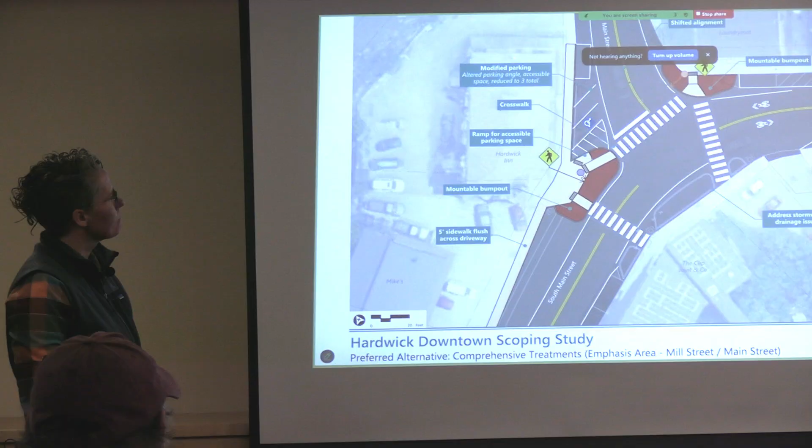That's true, and it's a bad spot for a driver coming from the east. Any vehicle I drive, the column on the front windshield creates a blind spot where it's just an odd circumstance, but you can't see that crosswalk, the second one there around the bend. You have to really kind of look around the column and see if there's anybody there. And to have those three so close together, it's messy.

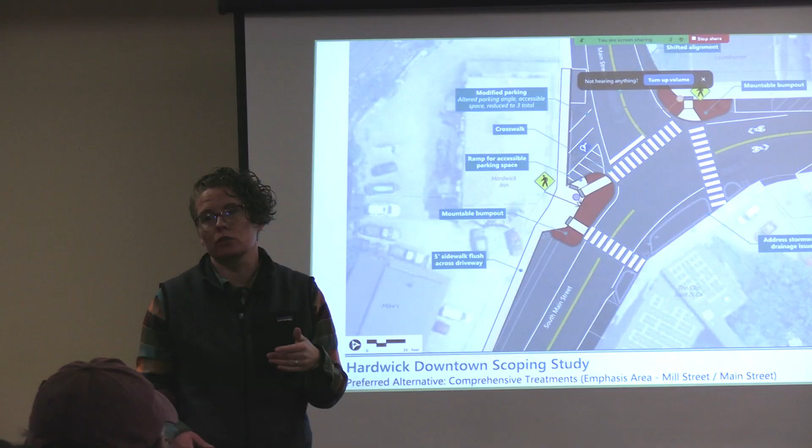Yeah, so a couple of things we're trying to achieve, and some constraints that could certainly be figured out in more detail in design - we are trying to establish this as more of a T intersection, and we want those folks to come in at more of a right angle than they do today. So really focusing in on where that stop bar ends up, so that folks still can see in both directions and have the visual of all the approaching traffic, and balancing that with where that crossing ends up. So if it does need to come back, we still have some space for that stop bar and that crossing to come back away from the effective edge of the roadway that's sweeping through that curve.

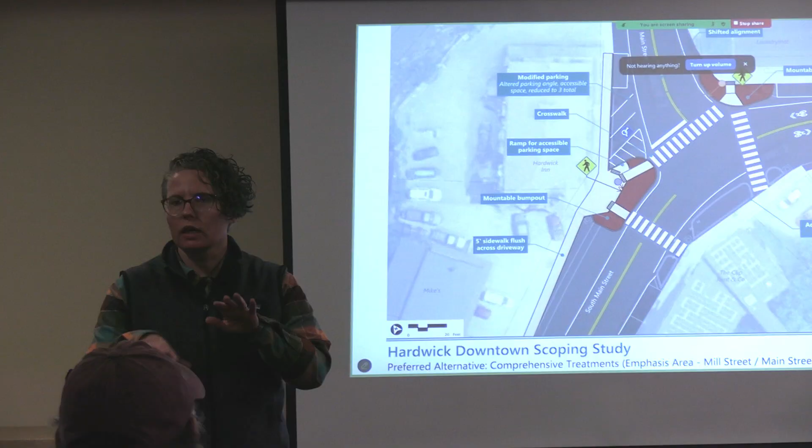So definitely something that we can be working on - that balance point - as part of the design.

The other bulb out, the one to the south, I think is critical because what encourages people coming off Mill Street to South Main and gunning it through that intersection too fast is that they, especially trucks, swing wide and leave the travel lane into what would be truck parking. I think that constriction will slow people down through there.

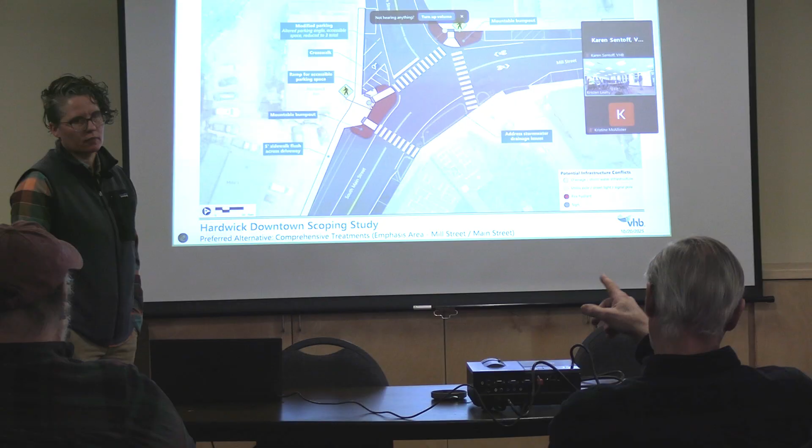I agree that perhaps pitching that crosswalk so it lands near the laundromat farther to the north is a good idea. That could certainly come up a bit and connect a little further north.

Well, we're talking crosswalks and painting. It seems like our crosswalk paint wears out faster than crosswalk paint in other towns. I don't know if we're using the best paint there is or painting it with the best method.

Will part of your recommendations be what paint to use to get the most longevity out of it? That's a design detail we probably won't specify as part of this project, but I hear you. There's a lot of traffic that moves through this corridor, and different segments of Route 15 see different levels of traffic. We have to recognize it takes a lot of abuse, and some of that is just the maintenance patterns for that particular treatment. That's something we can make recommendations about budgeting for, but it needs to be maintained year over year.

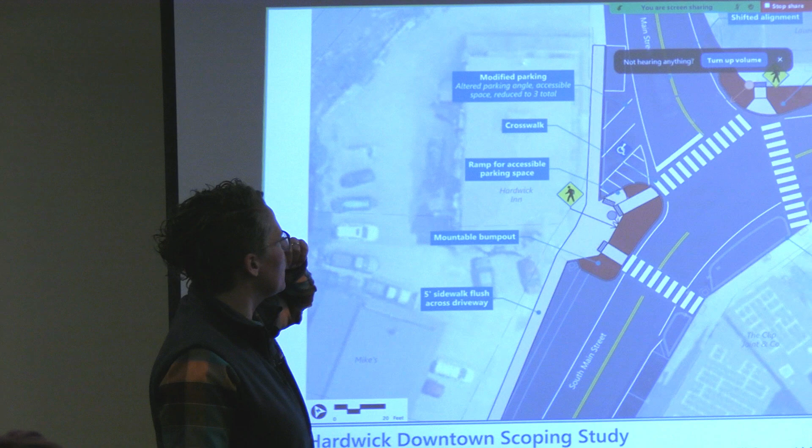This took one parking space out of that spot already, right? I think it reoriented a parallel spot, and there's a parallel and an accessible spot there. They took out one at the end and one more.

I just wanted to say that this has been identified as a very dangerous stretch of road, and we have had pedestrians hit. So I think we are weighting things toward pedestrian safety. Cars are gonna be fine. It's the bodies out there in space that don't fare so well.

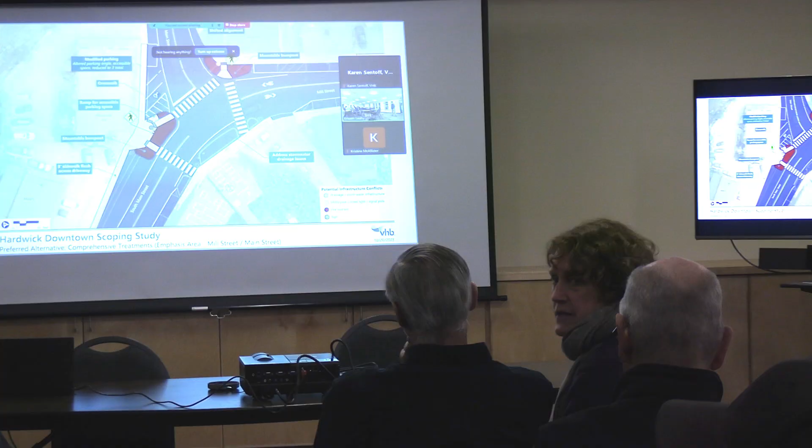I walk back and forth here all the time, and I never use those crosswalks because I don't want to cross there. The blind spots coming around the corner, you almost can't see. You have to cross them farther back and pay attention when you cross. People don't stop for the lights, they just blow through, or a kid runs through with a phone every day. So you have to make a choice. That one's not gonna work when there's one of those cars with no muffler coming.

I agree with you, Rob. I walk that all the time. I live right around the corner, and I always go farther up North Main Street and then cross. There's not a crosswalk there now, so none of us should be crossing there. But if it's safer, you're gonna do it. I go from the co-op up North Main Street and then cross. But very rarely do I see people do that and go the extra distance. I see them take their life in their hands and go across.

One time I was watching, and since I'm on the planning commission, I take pictures and document what I see. I've got a photograph of a woman with a laundry basket and a small child by the hand crossing through there, with cars and everything. We need that crossing because people will cross there regardless. The key is to give them as safe a crossing as we can. And if people are ignoring it, we need to talk to the select board to demand that police are there so it's expensive for those who blow through, or they lose their license, because you can't design against somebody who's going to break the law.

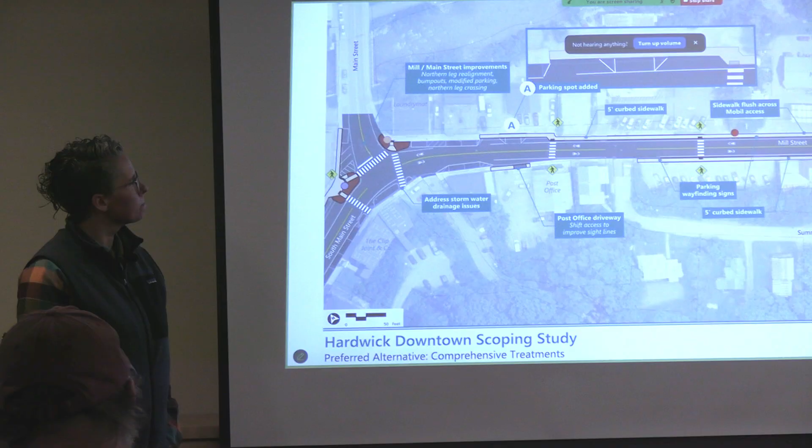This is my first time at these meetings, but where A is, has anything been considered about... there's an old mechanic shop there, and I know Buffalo Mountain Co-op employees park there. Has anything been considered about leveling that location and turning it into public parking? That I believe is privately owned, owned by the bank. Is there any way the town can purchase it or something?

Because I'm a business owner in that area, and I'm finding that this town's growing in population. I feel like if you don't do something to address public parking, eventually people are going to other towns and the businesses here are going to lose customers.

We've already lost one restaurant, Vittles, and I know there were a number of different circumstances, but I wonder if there were more parking available, they'd still be here. My suggestion was, I don't know if anyone here owns that location right now. It's privately owned, by the owner of the Blue Donkey. So I'm wondering if that were purchased and we were to level it, that could open up 20 to 30 parking spots.

And if you wanted to meter it, it would address the situation with people at the laundromat, if they aren't having to cross the crosswalk and can be on the same side. That helps. It's going to help the hair salon, the hotel, and other businesses right there on Mill Street. I'm just wondering whether that could be considered.

I don't know if someone owns that actively, because right now it's zoned as a mechanic shop, is it not, Kristen? No, it was rezoned as a restaurant. The gentleman who owns the former Citgo also owns the bank building. He purchased it, and the bank building lot goes just to the lines of the building itself. So the Citgo lot was purchased to provide parking for the bank building. They're owned together.